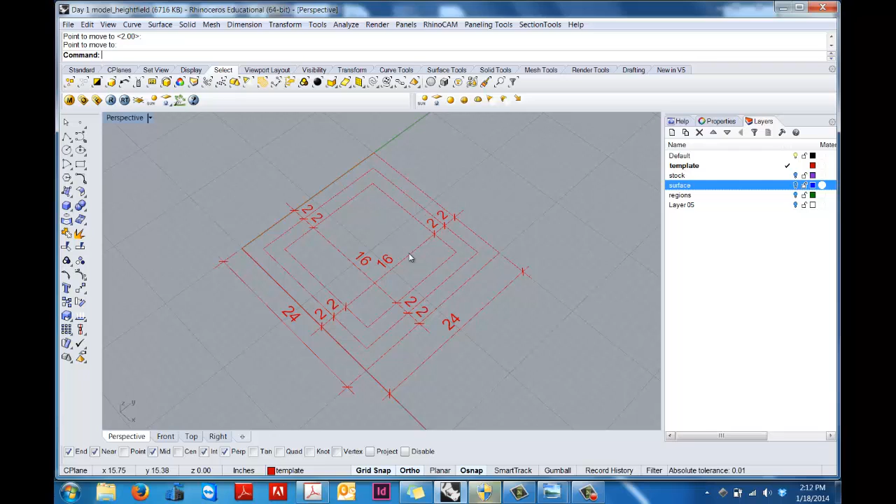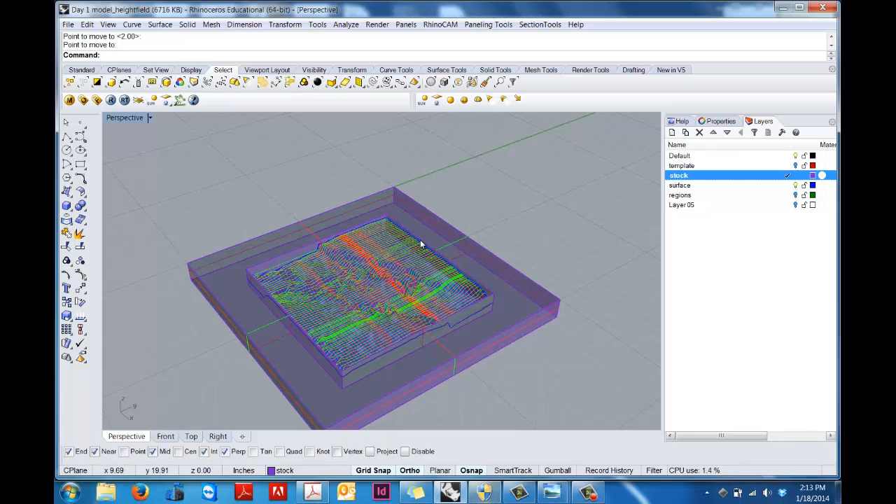Once you have that set up, you can set up a piece of stock around it, the foam that's going to go around your surface that you're going to be working with, so you can just extrude that. And then you're going to start generating surface. So we've already done this as part of our first week's exercise. We've generated some surfaces, so everybody has a surface that they're working with. In particular, I'm just going to start showing this one, which is a height field. It's not one of the ones I milled for this class, but I want to show you a little bit about steep surfaces first.

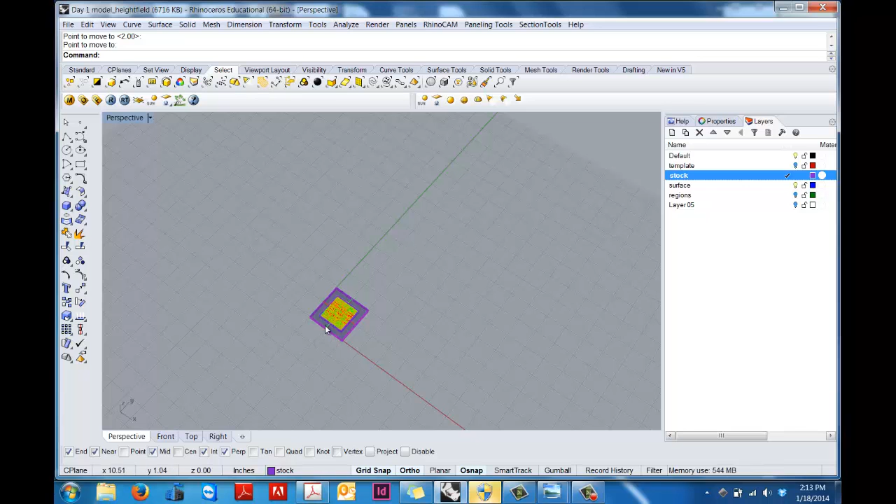So before you even are getting to use RhinoCAM, a couple things I would recommend. The first is you can see if I zoom out that I've really cleaned out the rest of my file. So in class we really emphasize an iterative process and developing a lot of different things that you're working with. But when you're coming down to milling your piece, it's really much better to just clean out your file, get rid of any extraneous materials, and just work starting at the 0, 0 axis here. So for our purposes, it's much easier when we're aggregating files to put in a lot of files all at once if everybody works from the same origin point.

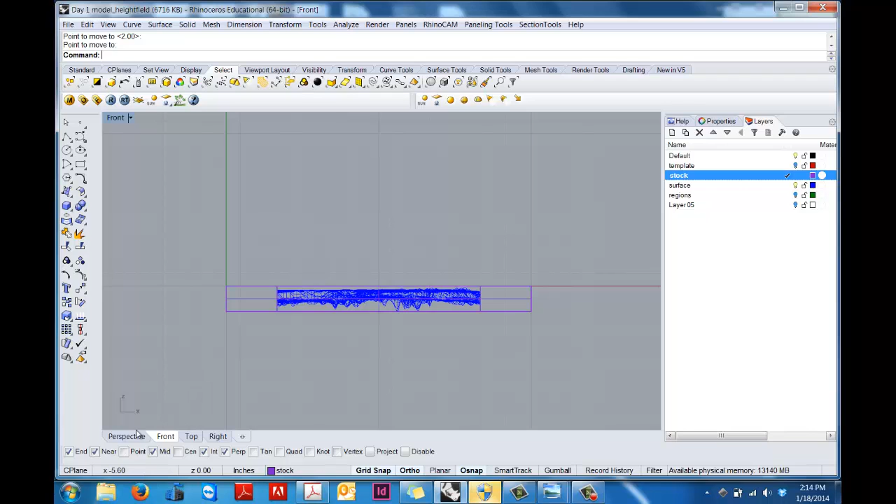So for us, we'd really like the origin of your model to be at the top of your model at the 0, 0, 0 point. So you can see that right here. It's actually at the top. The second thing is that you're going to want to work with a stock here that I've made. So you've extruded this to be 24 by 24 by 2 inches in the negative Z direction, and then your actual surface will be 16 by 16 in the middle.

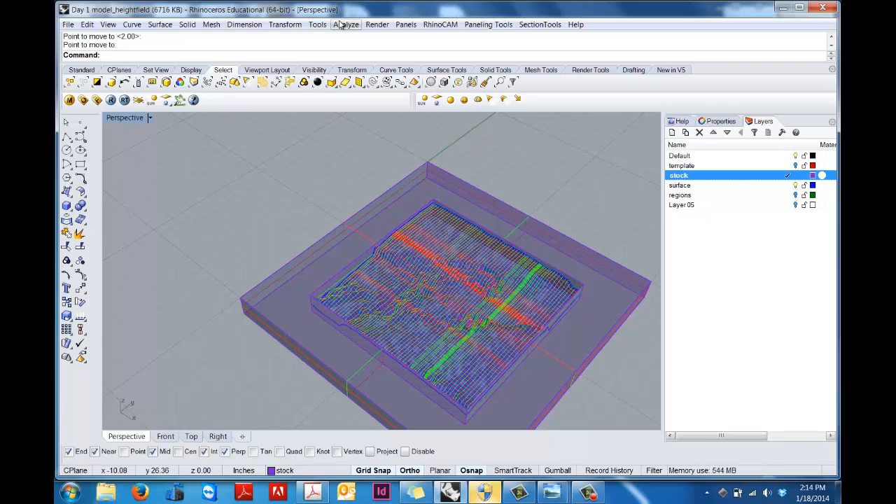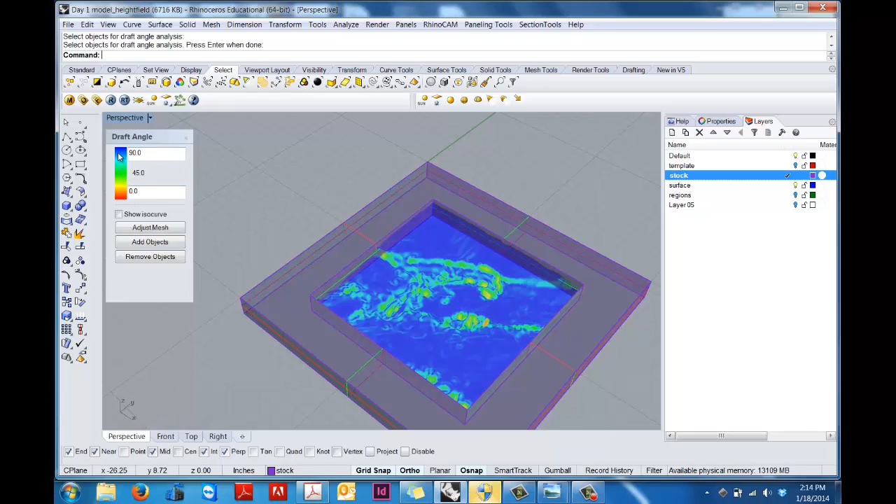So first let me just show you one thing, which is the main thing about using our router. We have a 3-axis router, and you cannot have any undercuts in your model. So one way to do that is to analyze your surface by going in here and saying draft angle analysis. You're going to click on your surface and then enter. And over here you can see the spectrum that we're looking for. So blue would be pretty shallow, and in this case red would be very steep.

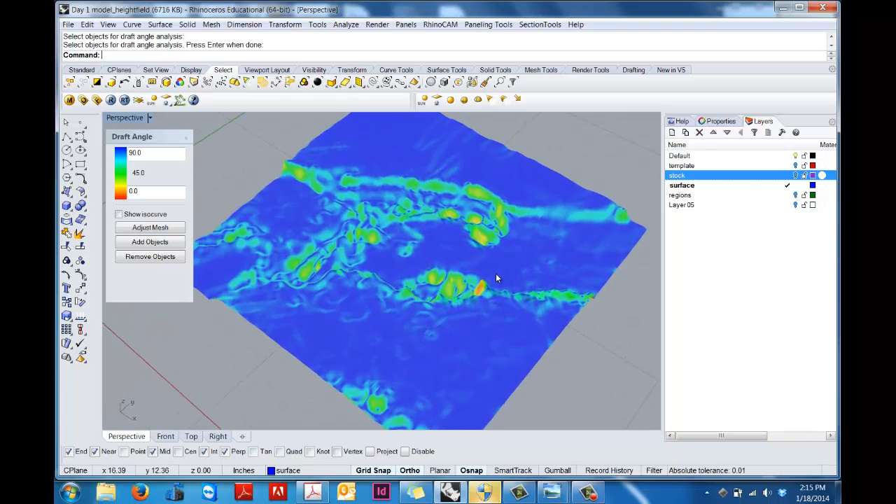We'll turn this off just so we can look a little closer. We don't have a lot of reddish orange even in this model. We have a couple of more vertical surfaces in here, but I think it's going to be okay. One way to really check and make sure you have no undercuts is to set it from 0 to 180. And so at this point 180 means everything's okay, and the blue means everything's okay, and the red would mean that you wouldn't be able to cut it. So it looks like we're okay here.

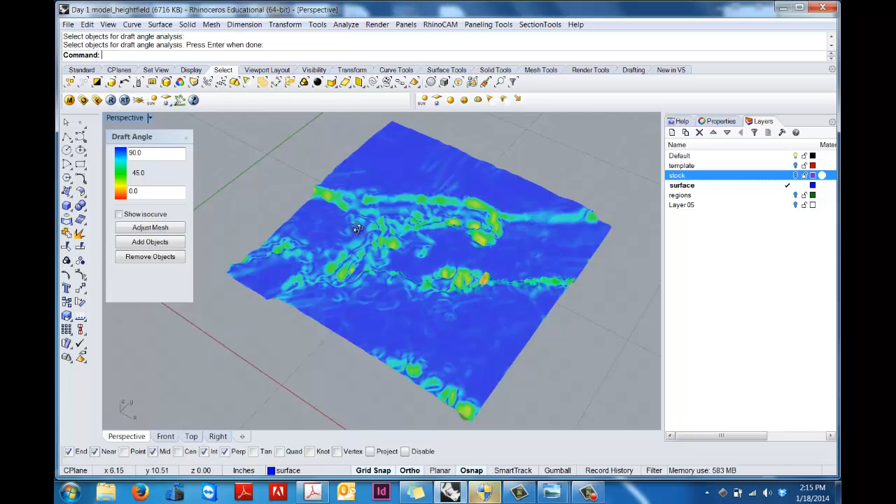If you'd like to save this for any reason at all, a way that you can do that is by asking it to extract the analysis mesh. So basically what just happened when we did that is we made a mesh, and it's a rendered mesh. So we do that, and now we're going to select this mesh, right? So now we've extracted the mesh.

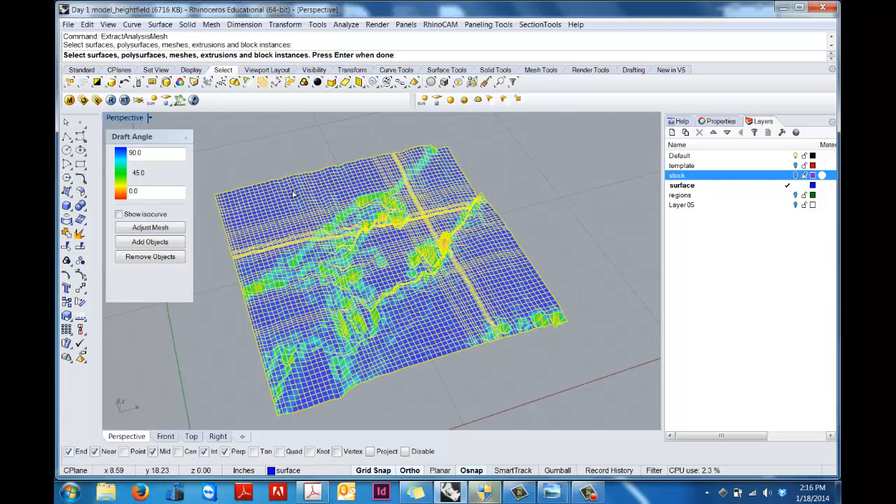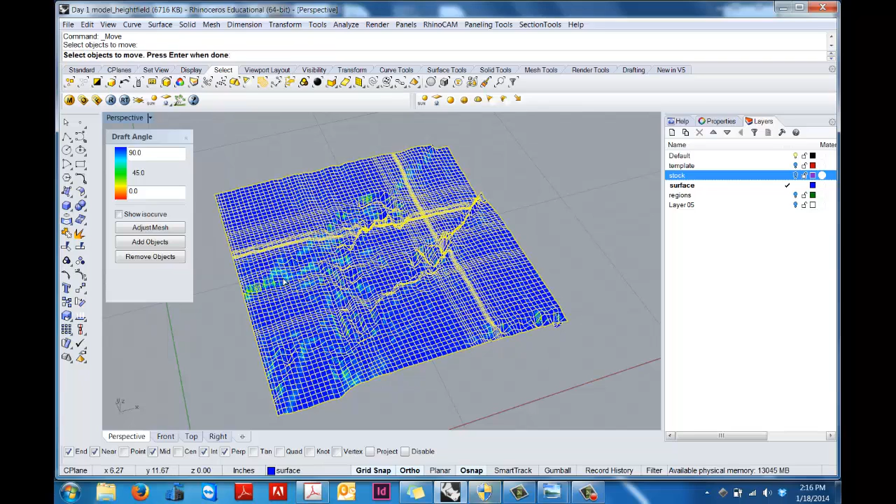You can see the mesh is overlaying, and as long as we keep this little draft angle box on there, we have the mesh. You see we can adjust the mesh, but if you want to keep this separate from your surface for any reason, you can pick it. Looks like I'm picking my surface, but for now let's just clear them from each other. There we go.

Oops, looks like I took my surface with me. Okay, so now I'm just going to move the surface just to show you, and then we're going to actually move on to another file.

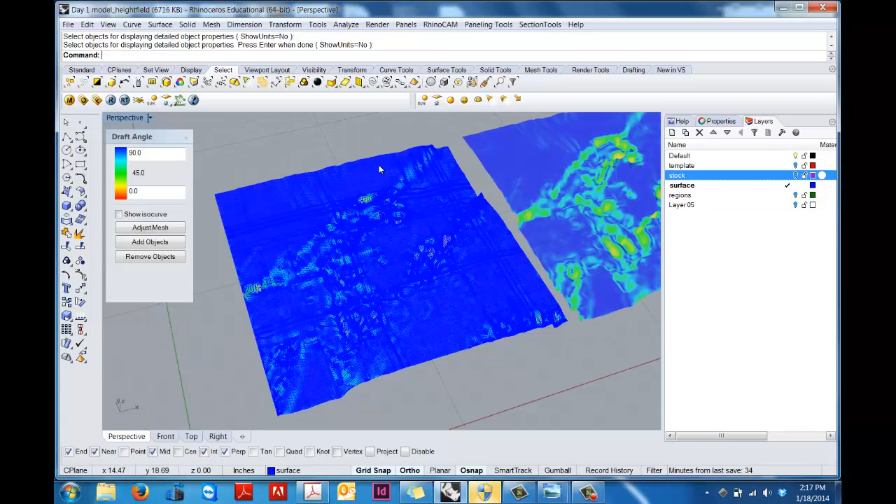Okay, so here, if I turn this off, now I have the meshes here and I have the surfaces here. And if you're not sure what's what, then you can click on here and you'll see this is a mesh and this is your surface. So in this case, if I want to keep it, I turn this off, and then you can see if I go into rendered that my regular surface is just rendered plain, and then the analysis mesh retains the colors.

So if you want to keep that just as a reference, so as you're changing your surfaces, you're keeping track of what you're doing, you're welcome to do that. Okay, so for now, actually what I'm going to do is go into a different file that I was working with. So we're going to save that.

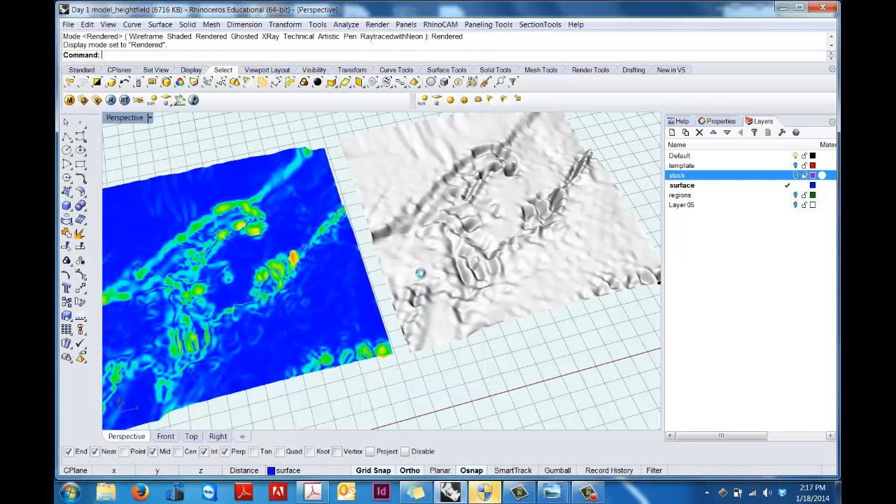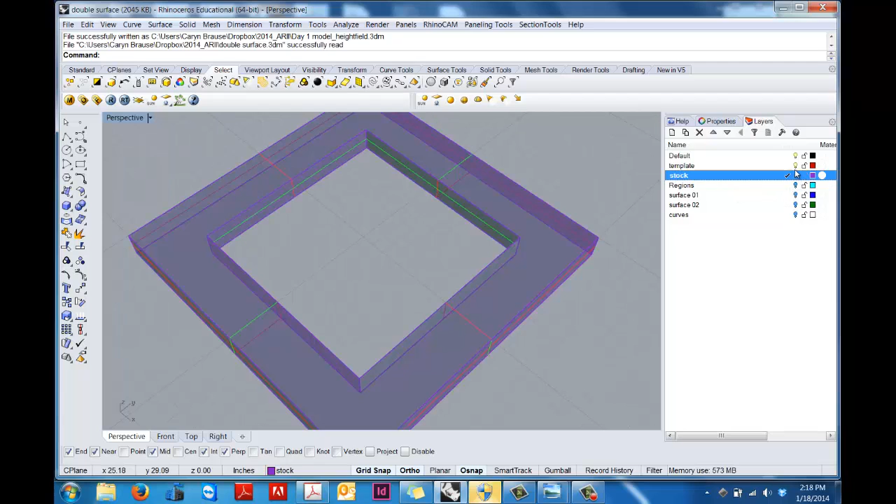All right, so here's the surface that I went and milled for this class. So just to go back to the layering system, you have your template that you're going to set up to get started. It looks like I erased it, but before I did that, I made my stock, and then I made a surface.

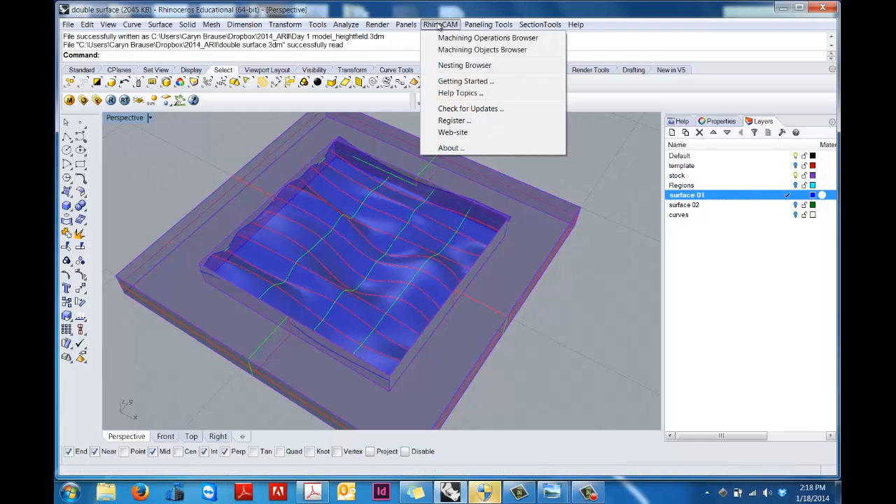Okay, so most of you are going to be working on RhinoCAM in our lab in FAC 444, and something that you're going to need to know about in there is that because it's a group lab, there's a few things that you need to know to load it. So this is actually on our course blog, and RhinoCAM is a plugin for Rhino, but it's our CAM interface. You can see it looks like this, and normally when it's loaded, you would have this tab up here. And so you can click on it and you get this machining operations menu over here.

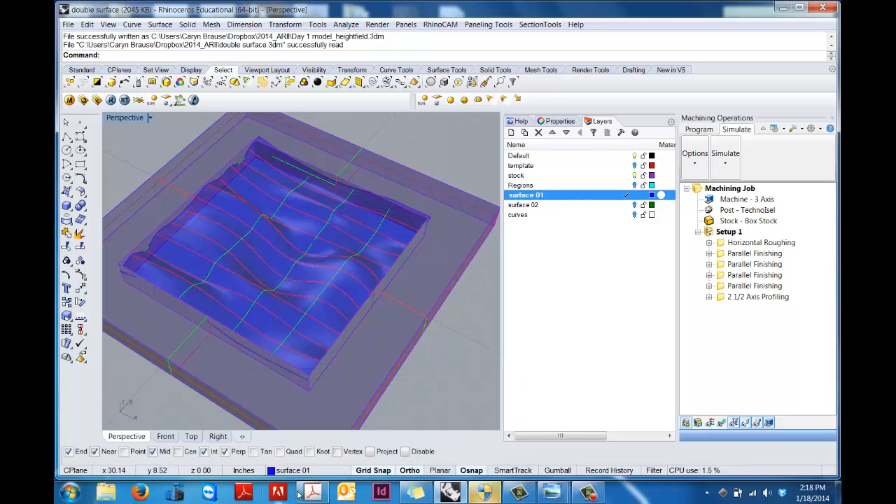If you're in the lab and you pull up Rhino, you've probably noticed that it gives you a question about whether you want to load the software. And if it doesn't, then pull up this document and you're going to go to Plugin Manager, which is going to give you this long list. You're going to scroll down, and then if you don't see RhinoCAM, you're going to say Ask to Load Disabled Plugins. And then when you close Rhino and reopen it, you're going to get this dialog box, and you want to click Yes to run RhinoCAM.

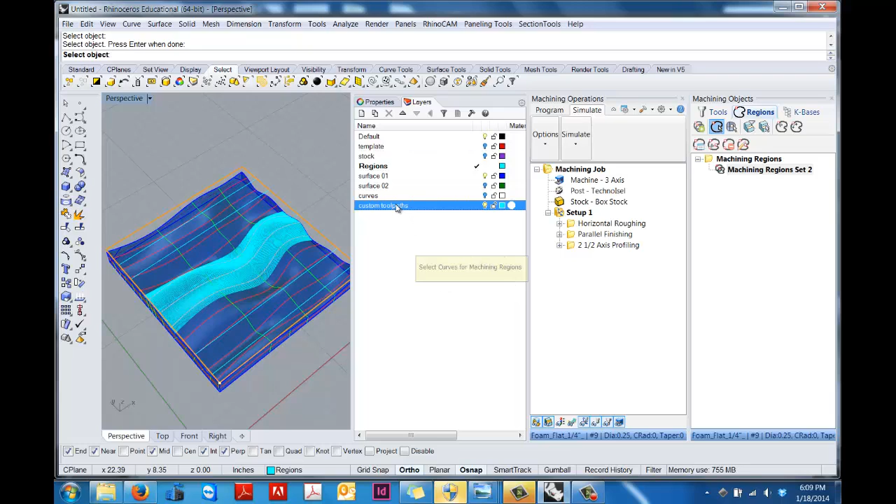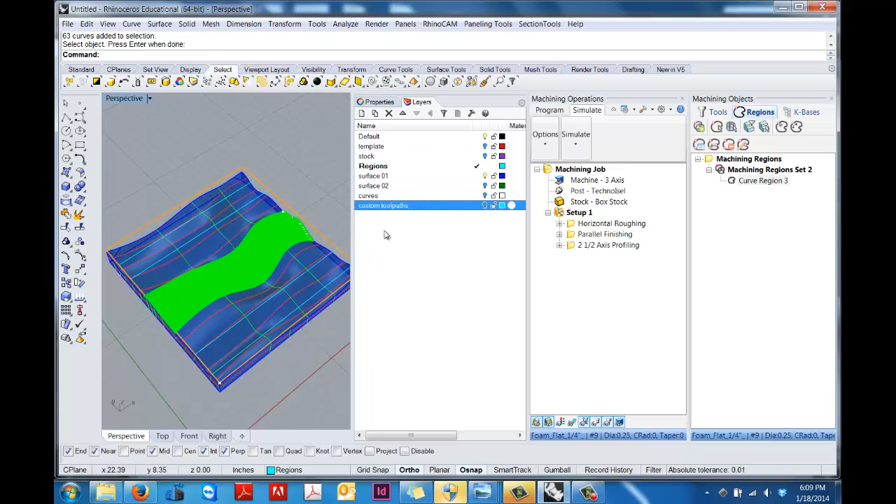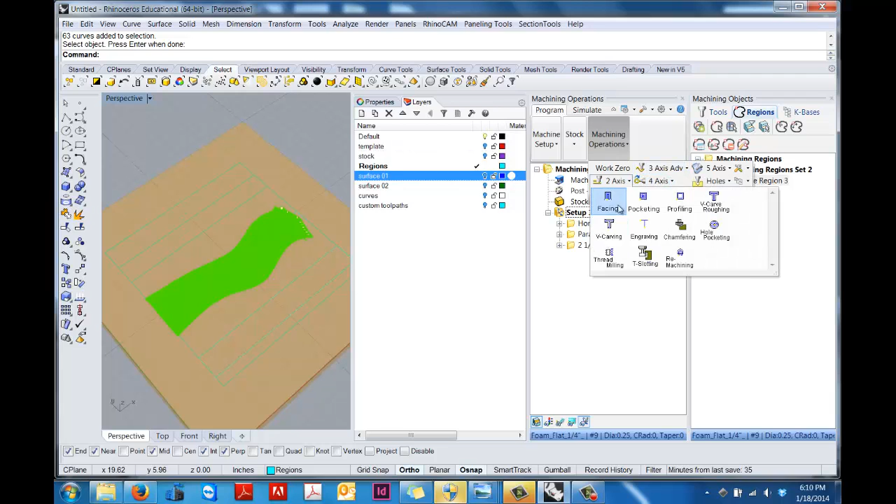What I can do is go into the program and select engraving. So I'll go through a few more setup items. I'm going to select an engraving, and then I'll start generating toolpaths. Under regions, instead of picking that big outline, I'm going to select predefined. And this is my curve region, the curves that I chose before.

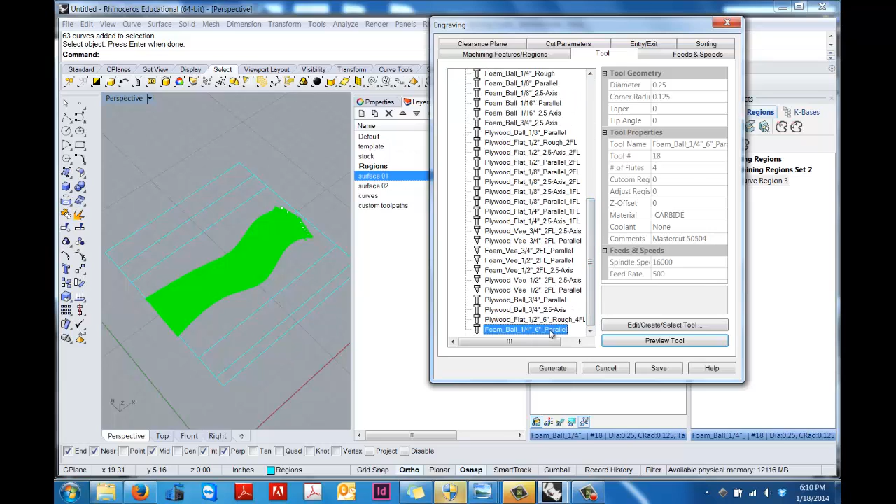This should already be preset for you, but you do want to check that it's set for this machine. I'd say let's go 3-axis and use a ball mill. So just check this, but it's probably fine.

The second thing is that it would be nice to raise the clearance plane, but we're pretty tight on our machine right now, so let's just leave it there. You can go in here for our setup. It should already say the post-processor for our machine, but if for some reason it doesn't, you want to check this and make sure it's set to generate that.

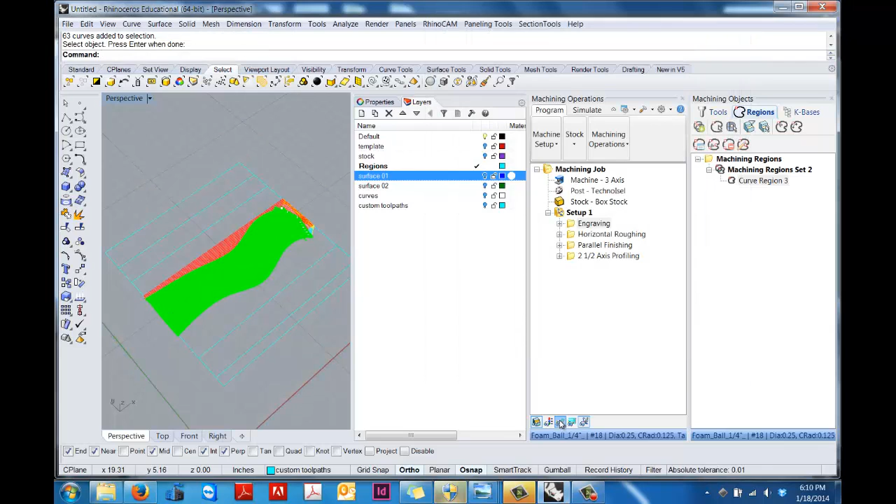I'm going to take a look at the toolpaths. So what you can see is the posted file extension for our machine is literally just an NC file, and that's what you're going to be working on.

Both of those should be fine, going along a line, lifting up and coming back down. So the next thing you're going to want to do is set your stock.

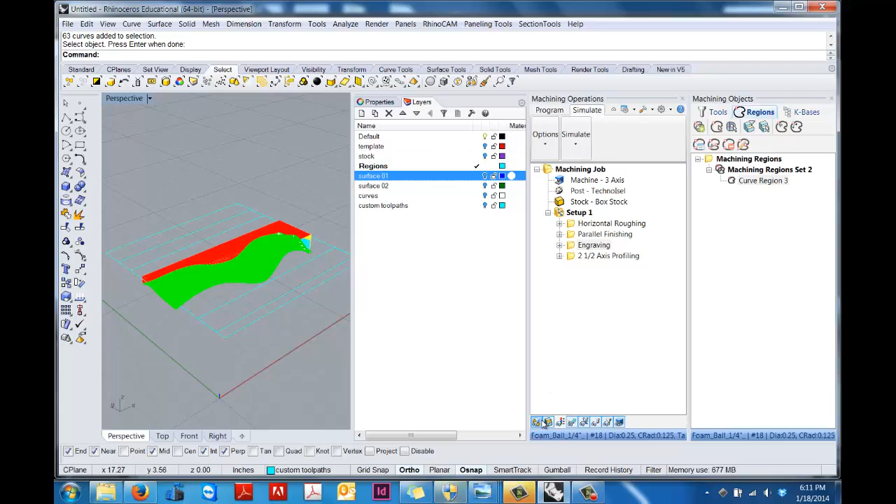You're going to create a box for this, which is just a regular box. Generally, for at least this first exercise and for much of our work this semester, you're going to check a box for stock, something rectangular. We're just going to copy the model's bounding box, and then we're going to run the simulation for the horizontal roughing and the parallel finishing.

So let's go in and check what you can do now that we have the engraving, and run that. So you can see here, we now have some simulation options, and you can go in, click on preferences, and there are a few choices that you might want to make.

Because these lines are spread a lot more apart than our model, a voxel-based display is going to run a little bit faster, but it's going to be less complicated. A polygonal model is going to give you a finer resolution.

So I had this set for a polygonal textured surface overlaid on top of the parallel finish the other day. By playing with the settings, you can easily change the consistency, lowering it to the voxel finish or the polygonal finish, and you can really get some nice effects.

One thing you might want to do is keep your stock a little bit transparent on this end of the spectrum, so that it's not bothering you when you're looking at it, but you can still see where you are with the engraving. And then we want to keep your tool display set to solid display tool.

That's just going to keep going. There's not a whole lot more to say about it, so we're just going to say okay.

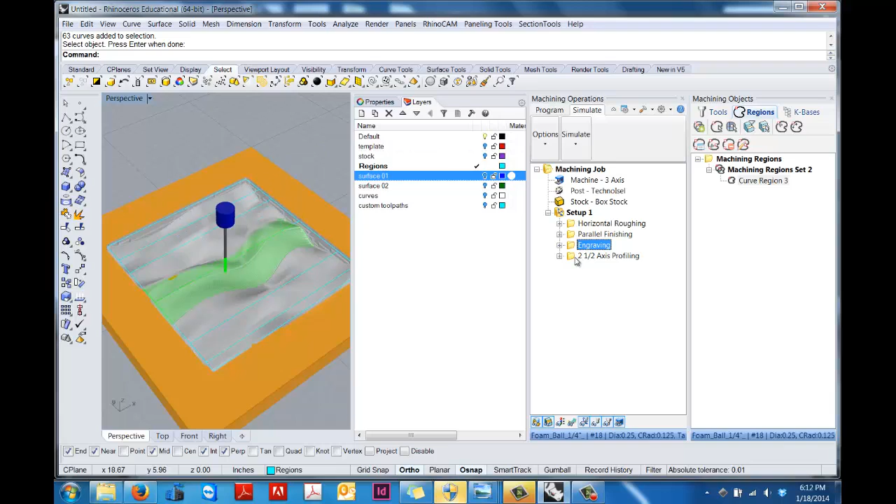I would encourage you to try this, even if it's just drawing your own lines for setting up machining operations on top of your model and projecting them down, to play around with some of the different effects you can get. What's really important here is understanding that, if something's disappearing on you, there are different tabs at the bottom depending on whether you're in program or in simulate.

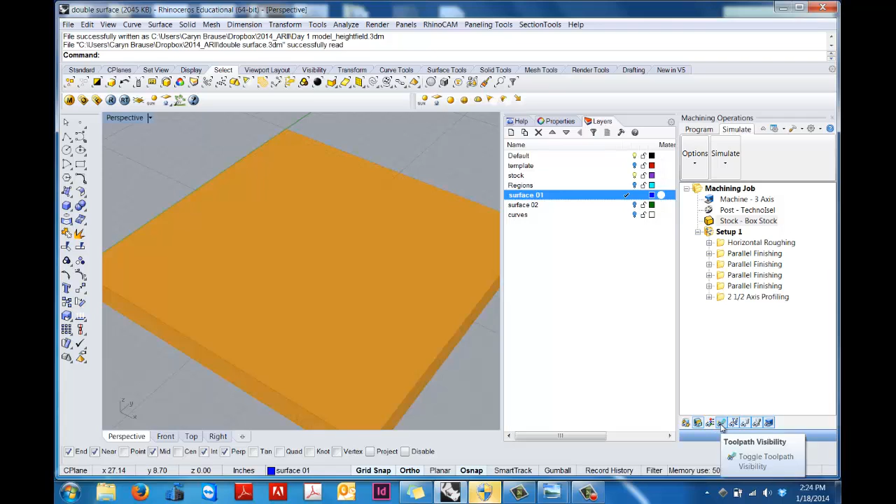So in simulate, you can toggle on and off the actual model. You can toggle on and off the stock to see where that's sitting. You can toggle material texture. Here it's just preset to some sort of wood. And then there's the tool path, which we don't have any of yet, but we'll get into that a little bit later.

So my main point is that things do look different in the different tabs. So if you're in one or the other and you're confused about why things are working a certain way, just look down at the little buttons down here, so we can toggle the stock visibility, right?

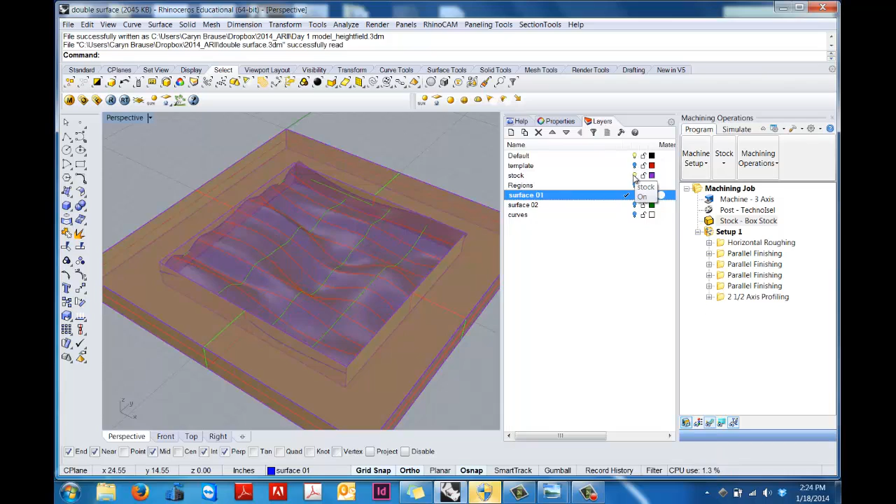So if we turn off the stock that I have in my model, we can see how this is sitting relative to the foam stock that we're going to be using. There's that material texture, which we're going to keep off, and the toolpaths that we're going to generate. These are the main things that we're going to do.

That's going to conclude our setup video, and then the next thing we're going to do is go through toolpath generation. Thanks.